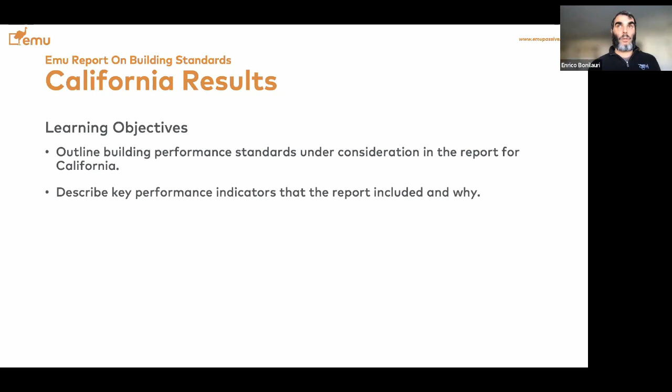So today's learning objectives, especially for those pursuing AIA continuing education credits: outlining the performance standards under consideration for this report, presenting specifically the results for California, describing key performance indicators included in the report and why we selected those indicators. We're going to outline the results comparing different building standards, describe the key factors that drove these results, and how professionals can utilize this data in designing better buildings, as well as informing colleagues and clients about passive house and why it's so important to build better buildings.

I divided this presentation into two parts. One is the overview of the actual full report, because this gives the context of how these California results were developed. Then in the second part, we're going to talk about specifically what this means for California.

Taking a step back and looking at the Emu report on building standards, we are in a market where there's a big push in North America toward electrification, driven from the top, with the Biden administration pushing for 80% renewable energy production by 2030, 1 in every 3 vehicles sold by 2030 to be electric, and to quadruple the use of heat pumps in residential projects. So there's a big push towards electrification.

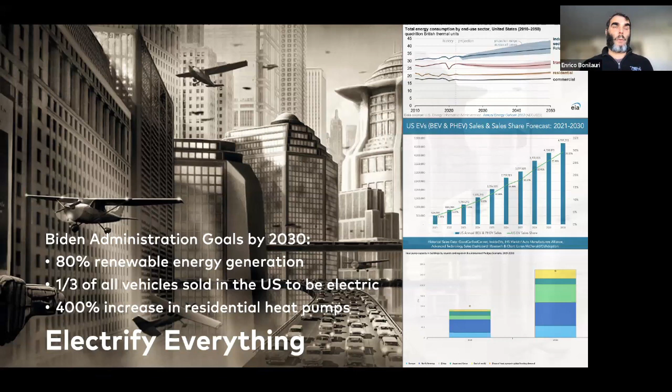This is in the context of also trying to make our buildings better. In fact, a quote I always love to bring up, by Rem Koolhaas, is that people are voluntary prisoners of the buildings that we build. So we build our own caves, and we spend over 90% of our time inside buildings. The quality of the buildings we occupy has a direct, strong impact on our health and well-being, and that should never be underestimated. So in comparing these standards, we had a strong focus on the quality of the building, not just in terms of energy performance, but also on how these buildings can be good shelters for people.

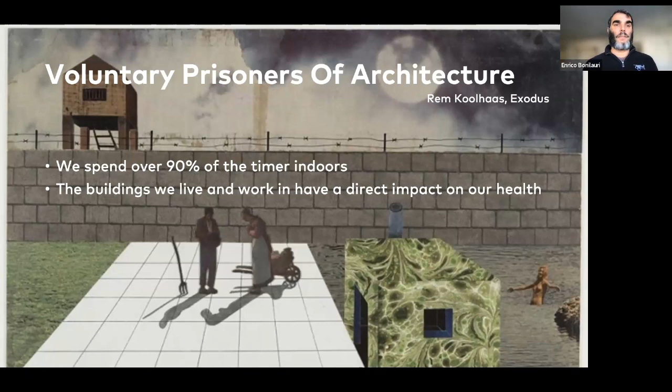Now, a question we always ask builders and people who participate in our training is: on average, how many years do you think an American family stays in a house before they move out again? This is key because all the investment we make in our buildings impacts the people who occupy them.

The answer we get from builders and professionals in the US is typically 5 to 7 years, and that is grossly inaccurate. It's actually 13 years on average. This isn't a statistic from PHI or the Passive House community—it comes from the National Association of Home Builders, who could care less about building better because they have their own interests. But this is independent data showing how long people stay in buildings, even in the US, and that's important to keep in mind throughout this presentation.

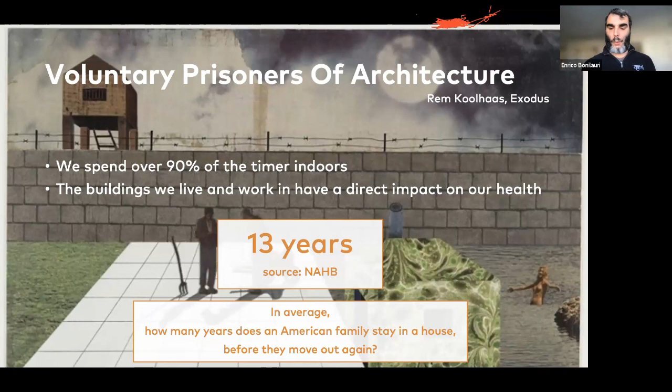The next few slides I'll brush over quickly to give you the idea of what's going on. These are the 50 projects we selected for the study, coming from our own pool of projects we work on for the consulting side of Emu, which is basically split 50-50 training and consulting. We selected these projects to be consistent, trying to have a blend of different climate zones so no one zone would overly impact the results. These are all single-family homes, new construction, giving us a high enough number of projects to be statistically relevant while staying fairly consistent.

The split between climate zones was a quarter of projects in climate zone 2 and 3, many of them in California. As many were in colder climate zones, and then half of the total projects were from mild climate zones. These refer to the national climate zone definitions.

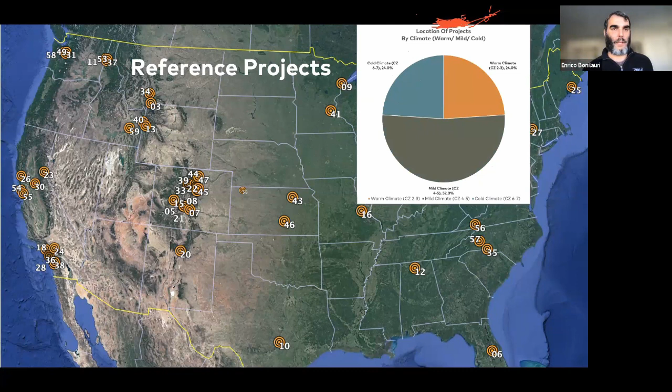These are actual projects, not some random standard design you'd find in an abstract ASHRAE standard. There's a client, a site, a surrounding, an architectural design. The high enough number of projects allows us to dilute outlier aspects, for example a lot of glass or a high form factor.

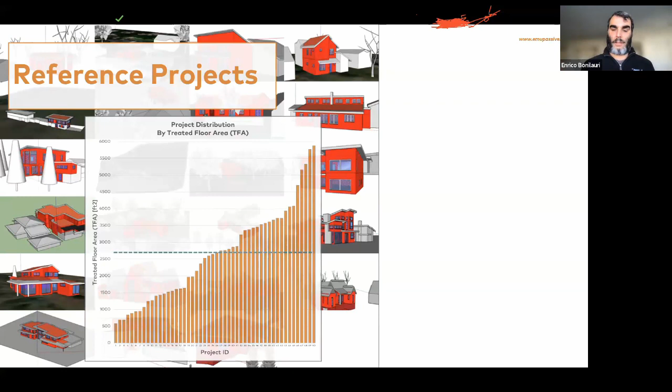If you download the report, there's a link towards the end of the presentation where you can find all the data for these projects. I don't want to spend too much time on this right now. There's a range from 500 square feet to about 5,000 square feet—we tried to select a range that was consistent. This is put in the context of form factor. I don't need to speak too much about that today, but please look at the main report for more data on that.

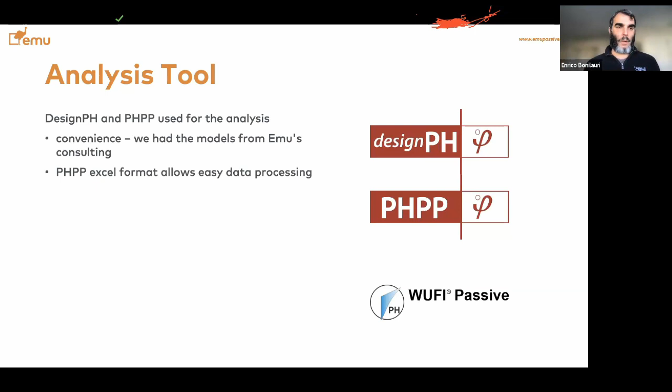For the analysis tool, we modeled all of these projects in DesignPH and PHPP. We did that out of convenience because we already had those models set up in our consulting practice, and the format makes it easier to elaborate. We didn't want this study to become a comparison of two, three, or more different softwares—we want to compare the requirements of different building standards, and we'll get to that. In fact, energy performance is just part of this result—it's not even half of it. So I'm going to skip over this; we'll see a little bit more in the next few slides.

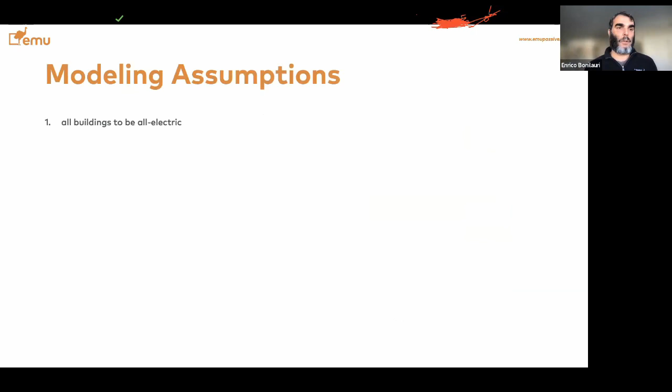Our assumptions: buildings were all-electric, because that's the direction the market is going. All buildings have active heating and cooling via heat pump, including ones in the mountains in Colorado, and domestic hot water via heat pump water heaters. Interior temperature was set at 70 degrees for wintertime and 74 degrees for summertime. We decided on this because, in my opinion, it's more representative of how buildings are actually operated in the US. So when we talk about PHI and Phius requirements, we'll come back to that.

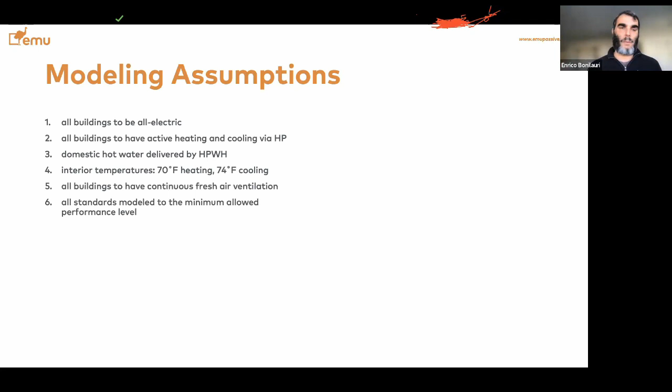All buildings have continuous fresh air ventilation, which is a big stretch for a code-minimum building—we talk more about that in the main report. All standards were modeled to the minimum level allowed by that standard. So if Title 24, Phius, PHI, Energy Star, or whatever has a minimum requirement, that's how we set it up in the model.

We talked about the effective R-value set up in PHPP. We did not account for the impact of catastrophic thermal bridges, which we'll talk about in terms of preventing mold and condensation, and how Title 24, for example, does not address that. But that wasn't included in terms of its impact on energy performance.

So again, coefficients and shading were included, and I'm going to skip over this. You can find more on this in the main report, but this should give you an idea of how the study was conducted.

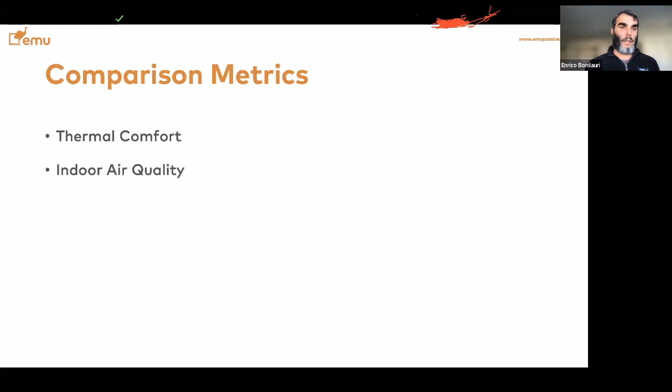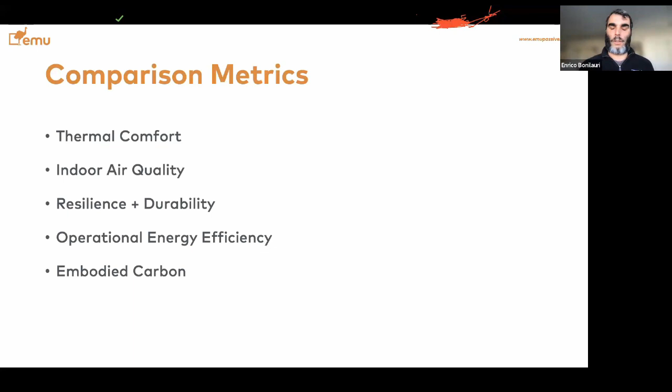Now, comparison metrics: we looked at thermal comfort, indoor air quality, resilience and durability, operational energy efficiency, and embodied carbon. These are the main metrics included in the report. So energy efficiency is only one of five. When it comes to California, we're also looking at indoor quality and comfort. Energy performance is only one piece of the puzzle.

The report has a big summary table that is kind of difficult to navigate. By the way, at the end of this slide deck there's a link to a channel on our YouTube platform where we have recorded videos covering these individual topics if you want to learn more.

Reduction of site energy for heating and cooling - again this is data from the main report. We're about to switch to California specific results. On average, this is what you can expect. For the main report, we used the 2018 IECC standard as the baseline. You'll see that if you don't account for PVs, California Title 24 does not look very performing, does not look very good at all, in this context. We'll come back to this point, but fundamentally California Title 24 is very close to the requirements of the 2018 IECC, except for the need for heat pumps and PVs. We're going to see how that impacts the resiliency of the building.

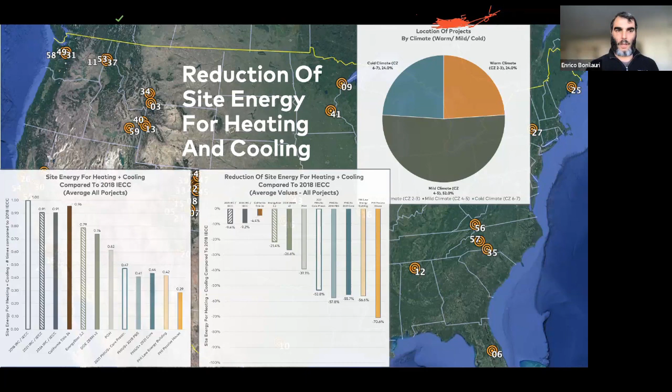This is benchmarking the same results for IECC and PHI. Again, look at the report for more information. This is for the whole study, so I don't want to spend too much time on this today.

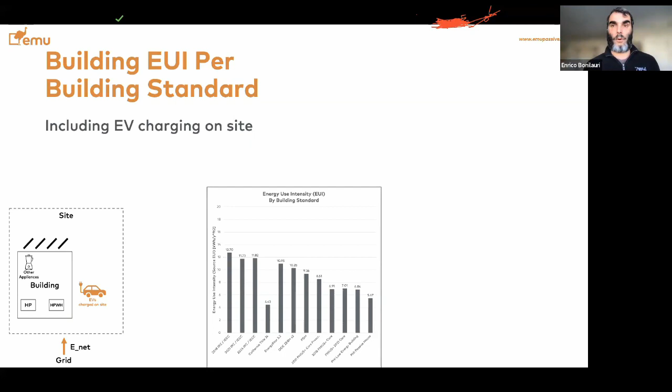For the EUI, something we covered in the report and will touch on for California today, is that once we start factoring in the adoption of electric vehicles, the efficiency of the building envelope becomes crucial for our infrastructure. In this graph, the solid gray is the EUI average for the buildings in the whole study, for heating, cooling, domestic hot water, and other appliances. The dashed gray and white is the additional EUI once we start charging vehicles at home. The dashed black and white on the right-hand side shows two electric vehicles per home charged. What's interesting is that today you can build a code-minimum building that complies with the IECC standard, and for the same amount of energy consumption, you can build a PHI passive house and charge two electric vehicles.

So in this context, for our infrastructure, it's key to have good electrical infrastructure. If we don't want to double the number of power plants we have, we need to invest in the quality of building envelopes so that we can minimize the impact and energy need that buildings have, freeing up power to charge electric vehicles.

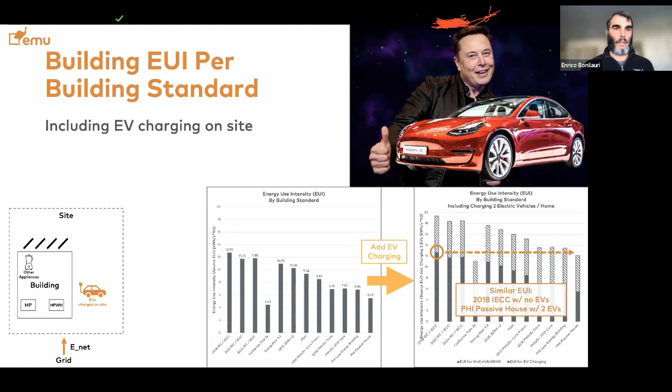Again, this information is described more in detail in the main report - please refer to that for more detail. The results are very complex: we talk about comfort, indoor air quality, resiliency, energy performance, and embodied carbon.

It's difficult to add 1,000 kilowatt hours to 3 ACH50 to a filtration grade of a filter. Because of that, for the report we developed a scoring system where for each of these five categories - thermal comfort, indoor air quality, resilience and durability, operational energy reduction, and embodied carbon - we gave points to each standard and had a final grading. This is illustrated better in the main report, but it's a simpler way to communicate the value each building standard brings to the table.

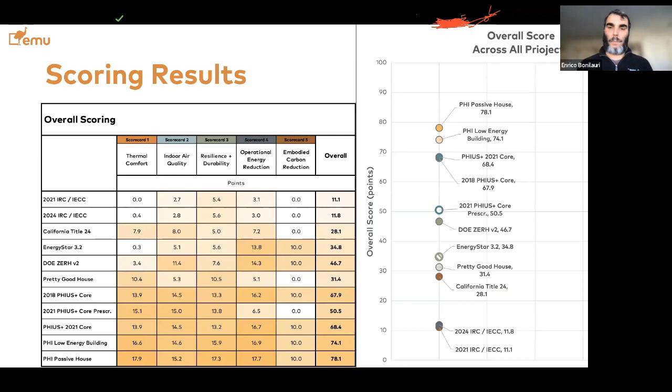Now, coming to the results for California: we have 11 projects we consulted on, mostly around LA, the Bay Area, and some in the mountains too. We have a breakdown like this for California climate zones. It does not represent all climate zones the same way, but it's a fair spread in my opinion - it gives a good sense of what's going on in this state.

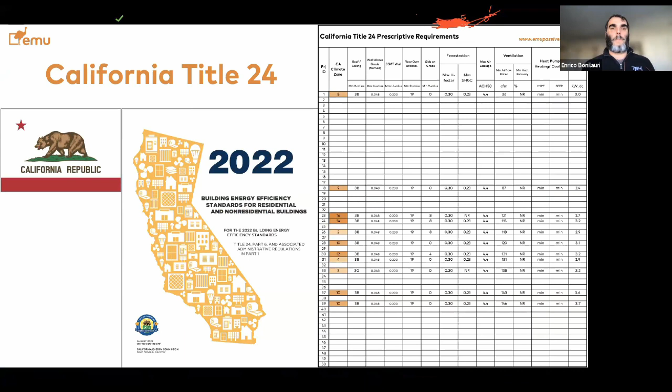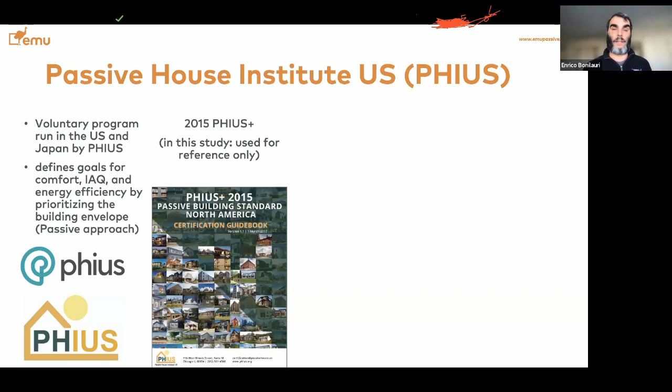For California Title 24, we derived the requirements to then be modeled in PHPP from the California Title 24 requirements, and this was our baseline for this appendix. For the PHIUS standard, we used the 2015 PHIUS Plus mostly for reference - we didn't really model it since it's 7 or 8 years old. We used the 2018 PHIUS Plus core, and the 2021 PHIUS Plus core, as well as the 2021 PHIUS Plus core prescriptive.

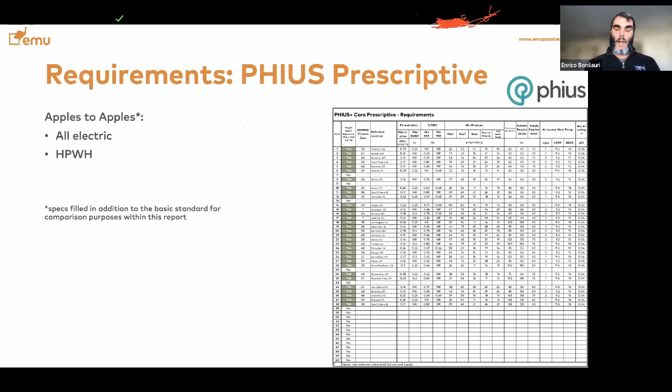These are standards that we used in the modeling for this report. The PHIUS prescriptive requirements for the 2021 PHIUS Plus core prescriptive we derived from the PHIUS website, project by project. That is for the prescriptive PHIUS, and for the performance-based PHIUS, the 2018 and 2021, we used the online calculators to determine the project-specific targets for heating demand and cooling demand.

Now, remember, this whole study is set up to have 70 degrees interior temperature during heating season and 74 during the cooling season. PHIUS and PHI both use 68 degrees for wintertime and 77 for the summertime. So the way we did it was we determined the maximum allowed heating demand for PHIUS through the website. We set up the PHPP models to meet that, assuming 68 and 77 degrees set point temperatures. And then we upped those temperatures to 70 and 74 to get the heating and cooling demand results. Same we did with PHI.

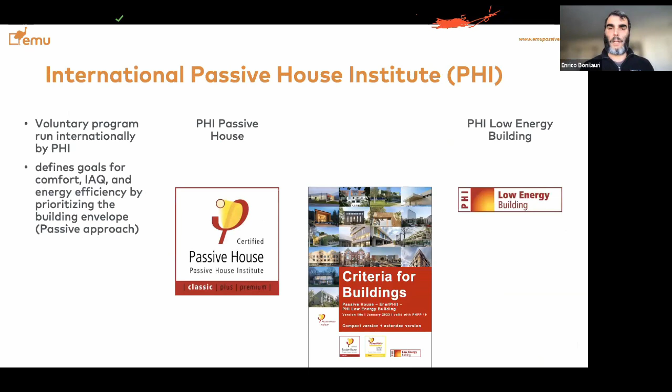For the International Passive House Institute, we modeled both the PHI passive house and the PHI low energy building. And in the same way, we set up the PHPP models to have 68 and 77 set point temperatures, and then we changed those to be 70 and 74, as that was deemed to be more realistic for the way buildings are operated in the US.

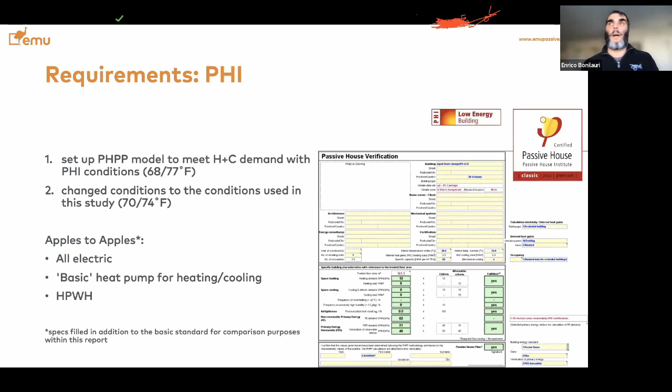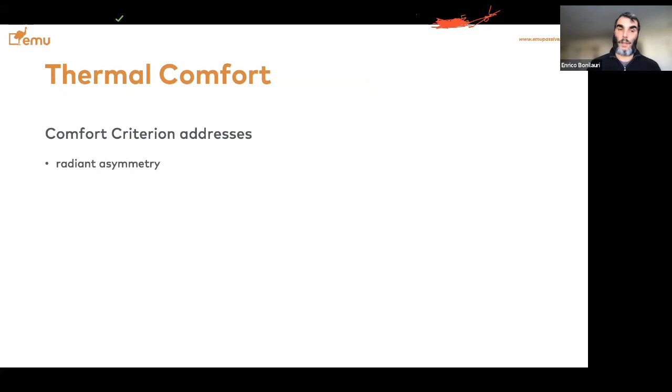Starting off with the metrics for building quality, as we call them in this report, we covered thermal comfort, indoor air quality, durability, and resilience. Starting with thermal comfort, the comfort criterion addresses the radiant asymmetry or lack thereof, and the absence of downdrafts. And the air tightness, which is the second parameter that we included in the thermal comfort bucket, addresses drafts and stratification, or prevents them. So passive building standards, which include PHI and PHIUS, have similar comfort criterion requirements as well as air tightness requirements.

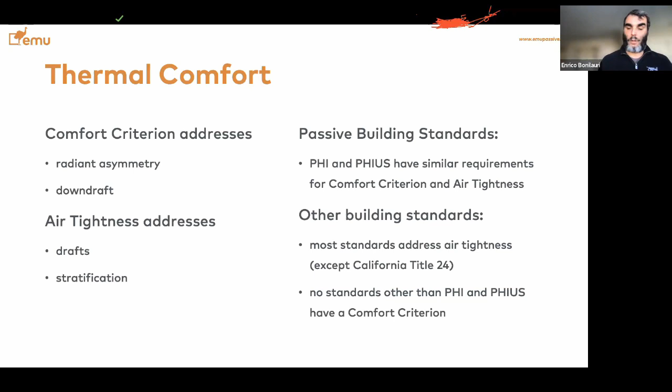We're going to see those in detail for California. Whereas other building standards, in this case Title 24, have no requirement for air tightness. We're going to see more of that later, and it does not have any requirements for thermal comfort in terms of specifying window requirements.

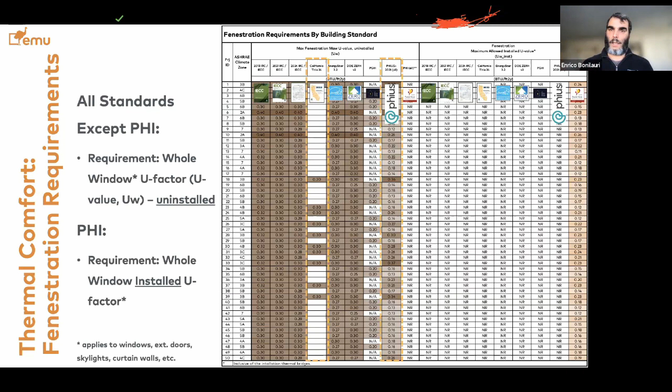This is the U values or U factors required by each standard. On the left-hand side, we have the uninstalled parameters. Uninstalled means that it's just the value that you get from the window manufacturer, whereas on the right-hand side, you have the installed whole window U values. And that is because PHI's requirements are driven by setting goals for thermal comfort. And so using the installed value also factors in the thermal bridge of installation. And these specifically are the columns, not that we care too much about individual data here.

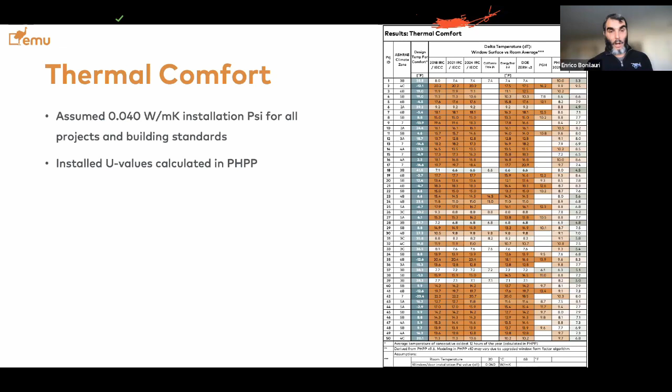Looking at this closer, we assume 0.04 watts per meter Kelvin installation PSI values for all projects and for all standards. And to be honest, that is pretty generous with regard to California Title 24, because if you have a traditional nail flange installed, the PSI value there can be twice as high or 3 times as high, especially if you're using some aluminum nail flange. So using 0.04 is very generous with regard to California Title 24. The installed U values were calculated in PHPP and averaged out.

With these results from the table on the right-hand side, California Title 24 fails to deliver thermal comfort in about every other project. Let it sink in.

It's California, it's mild. I'm from Italy, and everybody thinks that Italy is a warm, fuzzy country, but it can be very uncomfortable. I also lived in Sydney, Australia, for a couple of years, and that was the most miserable winter I've ever spent. I lived in Germany too, I live in Colorado, but because the assumption was that Australia is warm, buildings were built very poorly, and there were no requirements for thermal comfort.

So the current requirements for Title 24 for windows lead to half these projects failing the comfort requirement. For half of these projects, PHIUS requirements are actually less stringent than Title 24. That is something we found when comparing PHIUS prescriptive requirements to the Title 24 requirements for windows: in about half the projects, the requirements for PHIUS were less stringent than Title 24. And PHI's requirements achieve the higher level of comfort.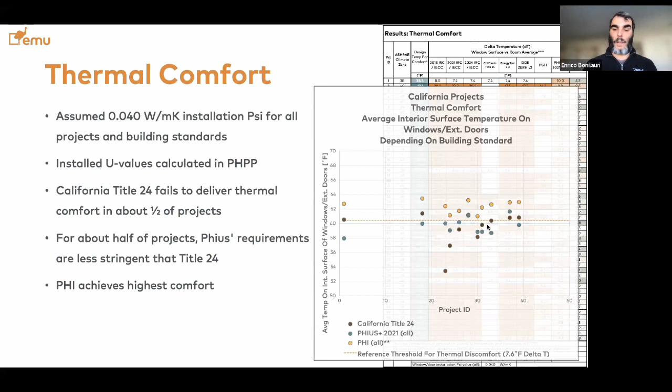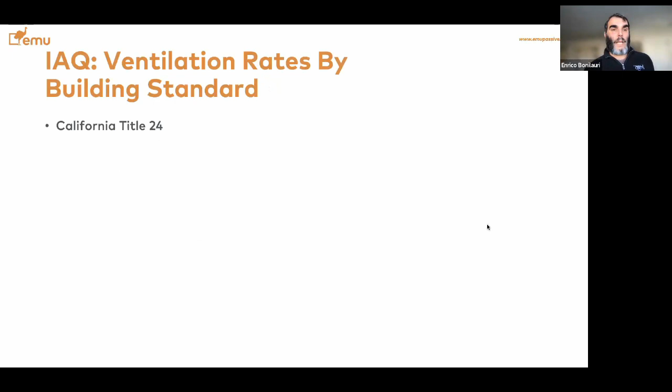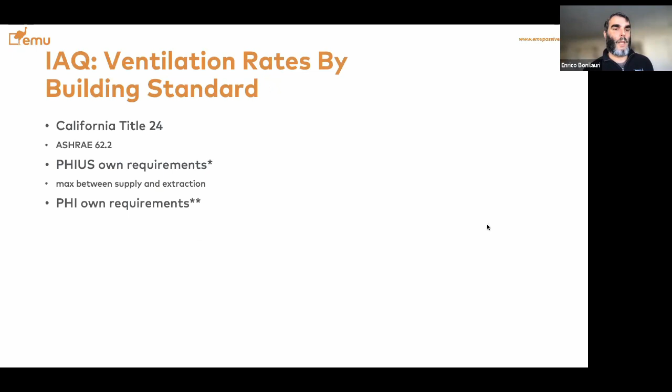Indoor air quality: we are going to talk about fresh air supply, fresh air filtration, air tightness, and avoidance of mold and condensation, as well as other indoor air quality goals. Ventilation rates by building standards. California Title 24 follows ASHRAE 62.2. PHIUS has its own requirement, which is a maximum between supply and extraction. PHI has its own requirement between supply, extraction, and volumetric.

62.2, this is where we're talking about building standards. We're not talking about individual projects. ASHRAE 62.2 assumes the number of occupants to be the number of bedrooms plus one, and PHIUS, on the other hand, assumes the number of occupants to be the same as the number of bedrooms. And I had conversations with a few people about this. They were pushing back on this parameter, saying that PHIUS follows the same ASHRAE 62.2. It's not true. If you look at the PHIUS guidebook version 3.1, I think it's page 35 or something, it clearly states that the number of bedrooms is the number of occupants.

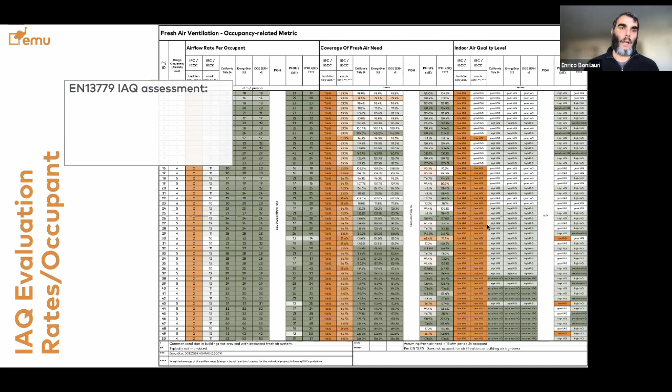And in this study, we used the actual airflow rates that we, EMU, specified for the project that we were working on for PHI. So this is the big table showing the airflow rates, looking at what that means in terms of indoor air quality. Standard EN 13779 assesses the level of indoor air quality based on the CO2 concentration levels. Air filtration is not accounted for, air tightness is not accounted for, it only looks at the CO2 levels, but it's a start. We're going to see the other parameters later in this presentation.

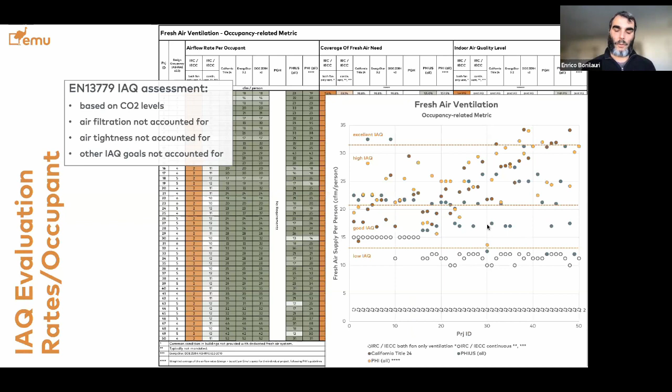This is the airflow rates for all of the standards we consider for the whole report, and this is for the averages across all projects for California. And you see that the three standards we're looking at, Title 24, PHIUS, and PHI, all fall within the high indoor air quality on the CO2 concentration levels.

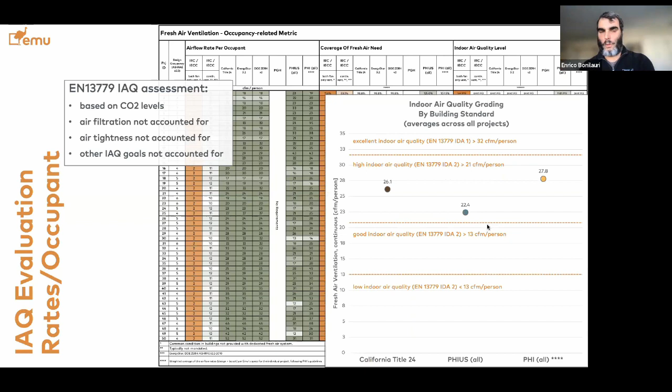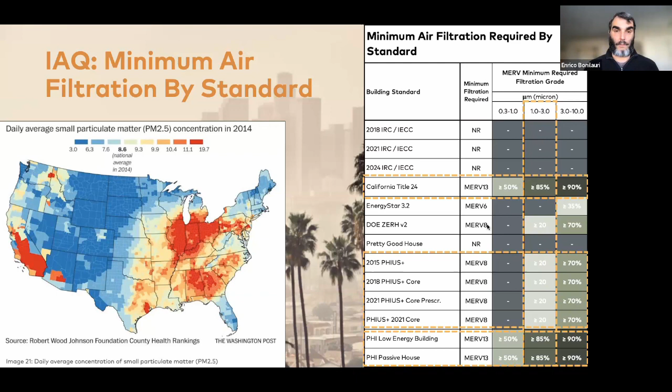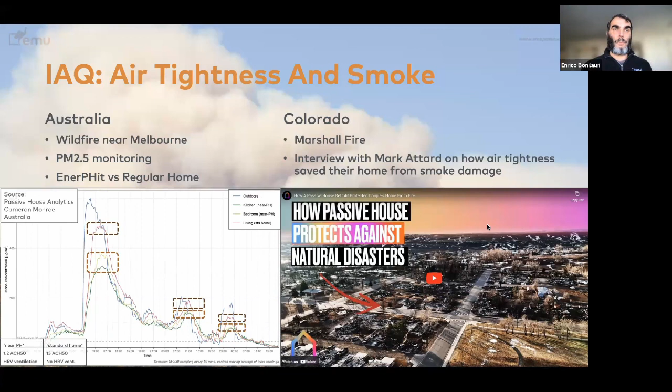And California Title 24 does zero towards the airtightness of the building. So in my opinion, the approach that Title 24 has put in place, it's half done. We have the ventilation, we have the filtration, and we have nothing with regards to the airtightness. So that is something that I think needs to be addressed in the near future.

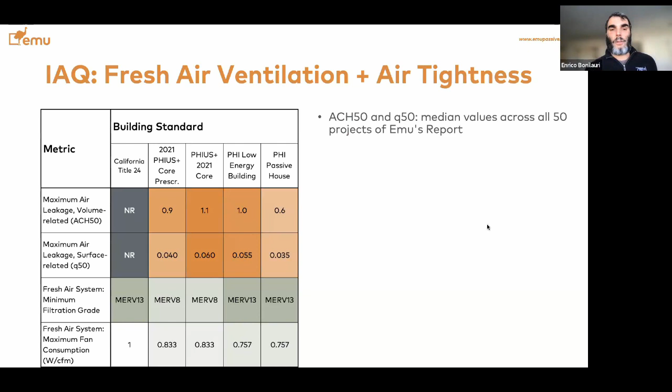This is a summary of the result that we covered so far. The ACH values and Q50 values that we list here are the median values across all 50 projects of Emu's report. The ACH 50 value is the volume-related maximum allowed air leakage by building standard. Phius does not set actual ACH 50 values, but we have calculated those. I think it comes up later in this presentation. It averages out at about 1.1 ACH 50 for the Phius core and 0.9 ACH 50 for the core prescriptive.

California Title 24 has no actual maximum allowed. There's no need for testing, and the building can be as leaky. I think the page on Title 24 is like 3 lines that tells you air seal everything, and that's it, which is kind of, I was very shocked and disappointed when I read that in reviewing Title 24. Phius prescriptive is actually more stringent than the Phius performance-based. And then PHI passive house requirements require the building to be about twice as airtight as a Phius performance-based.

And then we talked about the filtration, something about the efficiency of the fans. Title 24 sets a maximum of 1 watt per CFM consumption for the fans for the ventilation system. It's about 0.83 for Phius and about 0.757 for PHI, in case you were wondering.

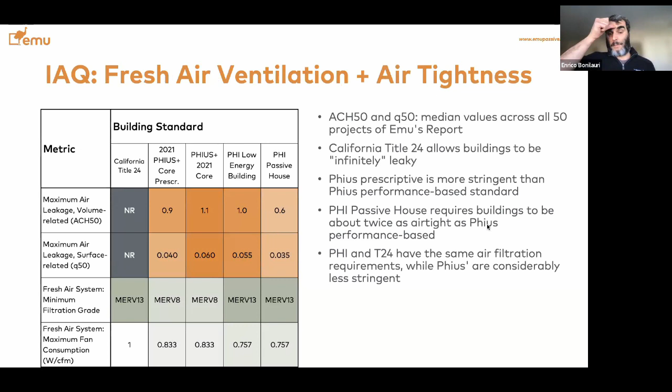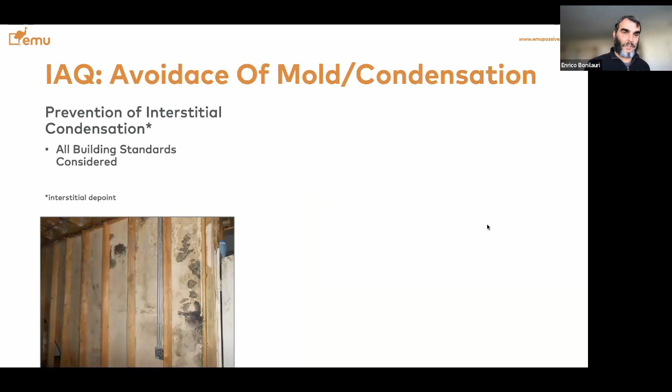Avoidance of mold and condensation is one of the most misunderstood parts of passive house. Everybody and their dog knows about the prevention of interstitial condensation. All 12 building standards that we have considered in the main report address it, and that is addressing interstitial dew point, which is a different phenomenon than surface mold and condensation, which is when we have thermal bridges, and thermal bridges cause lower localized temperature that provide the ground for mold to develop. And mold requires no condensation.

And that is something that most American professionals still have a very hard time to grasp, because it's so not addressed by code that it sounds very new. This picture on the left-hand side shows the after the fact of a building retrofit where they only changed the windows because code allowed that. The building became more airtight and filled up with mold because it had no actual ventilation system. So the more we try to air seal our buildings, the more we try to make our buildings more energy efficient, the more we need to care, because in my opinion, there's no point in making a building more energy efficient if it is also not healthier.

Phius addressed this partially. They accept the NFRC condensation resistance and the condensation index, as well as the AAMA condensation something, whatever it's called, and those are not actual ways to address condensation and mold because it's a blend of different metrics. I'm happy to answer more questions on this later.

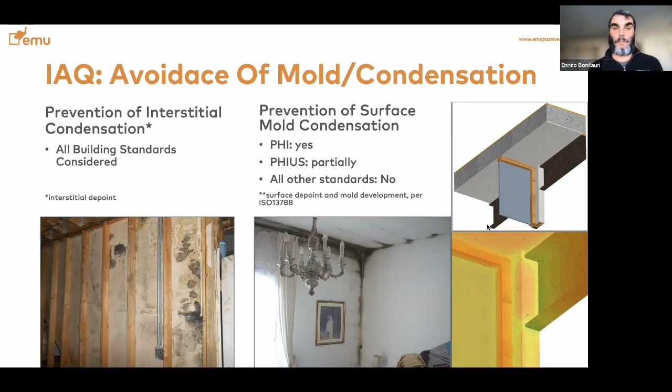PHI does require this. This is one of the hard requirements of PHI certification, called the hygiene criterion. Hygiene equals absence of mold. And what it looks like is basically thermal bridge modeling, where you can see localized lower temperature on the surface. In this case, we have a 3D thermal bridge of a beam crossing over to the exterior, uninterrupted, non-thermally broken, which causes all kinds of issues, mold and condensation. And this is by an architect that is famous to be a green building architect, but has never built a passive house because he wants to pull off this stuff.

Other building goals for air quality: Phius requires the EPA Indoor airPLUS certification, which has some requirements. It's a checklist. There's nothing too fancy about that. There's moisture control, radon, pest control, HVAC system requirements, combustion pollutants, and other materials in terms of limiting VOC and other parameters.

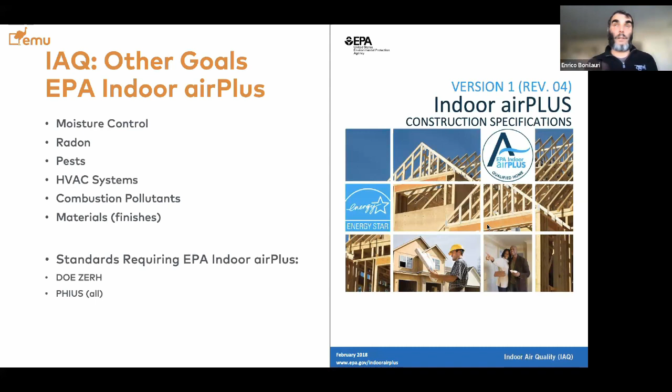I did not have time during the study to investigate how much good this certification does to an actual project. I'm considering pursuing this for my own house to be built in a couple of years, just as a way to try to improve the quality and also having a better experience with this standard. As I mentioned, DOE Zero Energy Ready and Phius required this certification, which was accounted for in the scoring that I mentioned earlier.

Talking about resiliency and durability, we discussed the reduction of air leakage because it makes buildings more durable. We're going to see about that, including avoidance of interstitial condensation, mold and surface condensation, and thermal resilience.

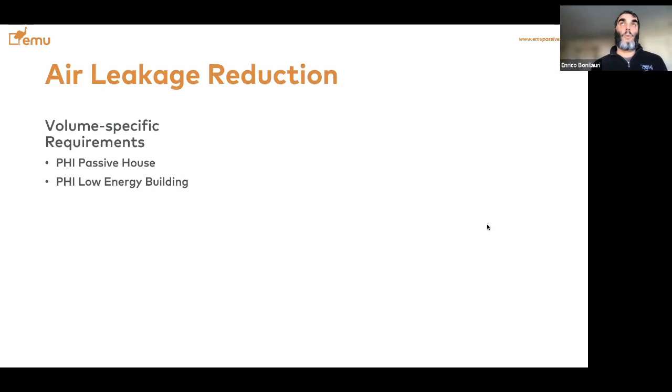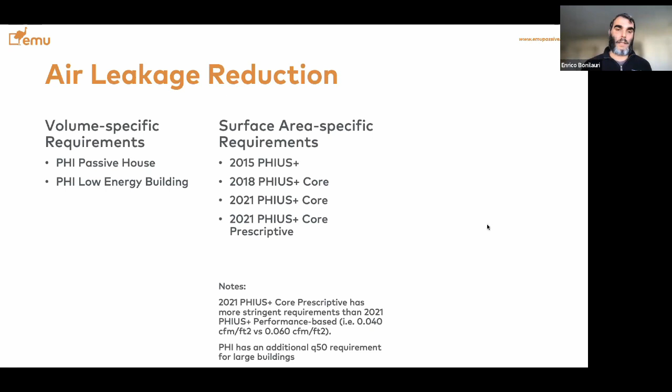The air leakage reduction, let's look at this in more detail. PHI requires a volume-specific requirement, the ACH50. The surface area specific requirement, the Q50, is required by Phius, with a note that the prescriptive Phius has more stringent requirements than the performance-based. PHI for very large buildings has a surface area specific additional requirement for certification. And then there is California Title 24, which has no requirements.

The value we see in the next slide, 4 ACH50 for California Title 24, is what we used in the modeling, because we cannot use infinite in PHPP, but it was derived by how the software is set up for California Title 24. There's no actual requirement for California Title 24 - it can be as leaky as you want it to be.

Volume-related ACH50, we calculated - you cannot convert 0.6 ACH50 to Q50 in general. You can do that for a single project because it has a combination of net volume and envelope area. But because we chose 50 projects intentionally, we could have a high enough number to draw statistical conclusions. Phius does not have any ACH50 requirements, but we were able to calculate those from these 50 projects.

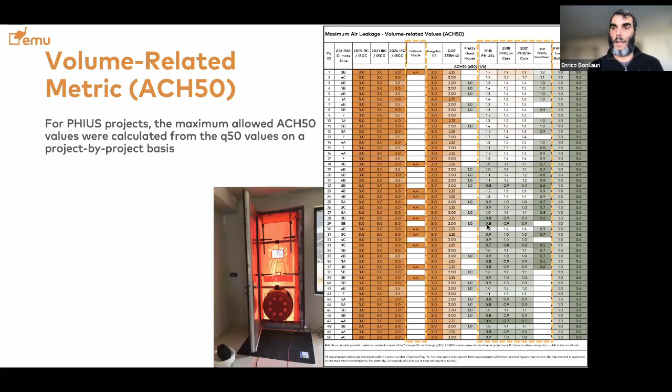PHIUS requirements for smaller buildings can allow up to 1.9 ACH50 based on the same 0.06 CFM per square foot requirement for the surface related metric. And this is for PHI on the right-hand side - we can skip that. For the Q50, surface related, same way - PHI does not have any Q50 requirements for this size of buildings, so we calculated these backward from the volume and envelope area of these projects.

This is again California and PHIUS, basically looking at the same air leakage measured at the blower door test and then related to the building volume or the building surface area. These are the median values across all 50 projects - on the left-hand side we have the volumetric, and on the right-hand side the surface-related values.

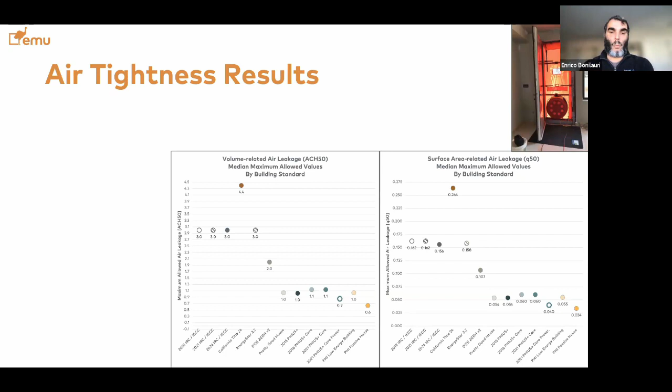Required by each standard, you see that on average Title 24 is through the roof, literally. Then there's a fair amount of building standards that require about 1 ACH50. PHIUS performance-based is about 1.1 ACH50 - median values across the 50 projects we modeled - and about 0.9 ACH50 for the prescriptive PHIUS. Whereas PHI low energy building is 1 ACH50 and 0.6 for PHI passive house.

Now, the ACH50 is more commonly known in the US. It is harder to meet for small buildings, and it is not as indicative in very large buildings. The Q50 value, the surface area related metric, is less common in the US. It's more strict on large buildings, and more lenient with regards to small buildings.

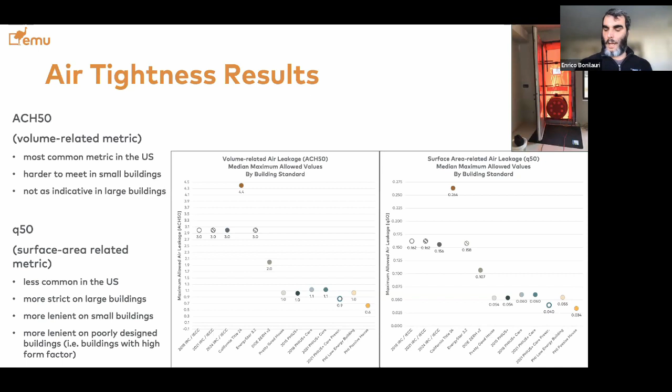It's also more lenient on buildings with high form factors, because the allowed air leakage is proportional to the amount of surface area that you have. So the higher the form factor, the more inefficient your building is, the higher the allowance you get for the blower door test using the surface related metric. This is talking about the metrics themselves, because that has an actual impact on evaluating them. For California Title 24, it actually allows infinite air leakage because there's no requirement at this point.

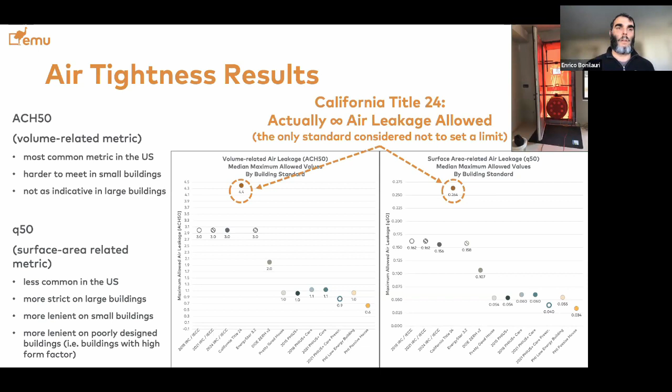Talking about resiliency, this is the Icebox Challenge in Denver, Colorado for the conference. I'm going to speed up a little bit. These are the pods that we have in class for the workshop where builders build mini passive houses.

They both mimic the resiliency of a passive house, where the envelope is very well insulated and very airtight, so it can keep the heat in case of the pods over time even if the power goes out, and it can keep the cool in case of the Icebox Challenge even when the air conditioning goes out. This is very important for California, because when the grid fails, the building is able to remain livable even if the heating and cooling system are not running all the time.

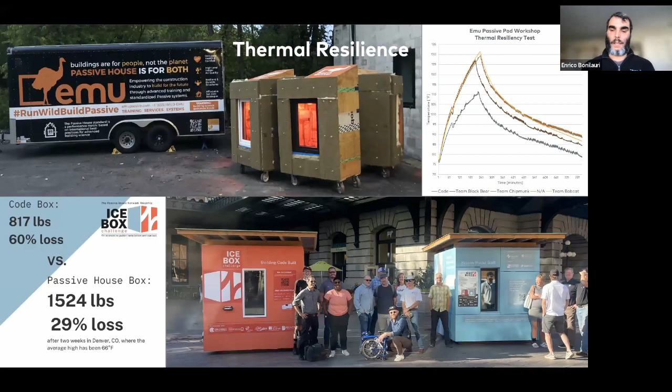Now, to try to mimic that - this is kind of the thermos versus coffee pod functioning that we have. To address that, we looked at the heating and cooling loads, and we tried to extrapolate the inclusive R-value for each building standard to estimate which building standard makes buildings more resilient.

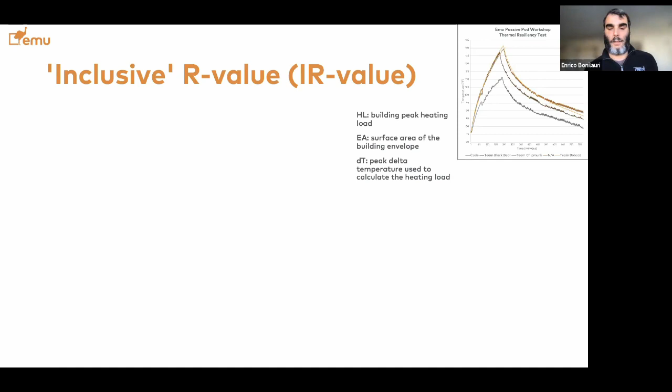This is the formula, it's described better in the report. I'm trying to speed up a little bit because we are falling a little behind.

The most resilient standard we considered is PHI Passive House. You see that in this scenario, the California Title 24 does not look that well. It's going to look better when we talk about energy efficiency, but that's thanks to the heat pump requirements and PVs. In other words, if or when those fail, the envelope of a California Title 24 building is not very good, and that leads to the building becoming unlivable much quicker.

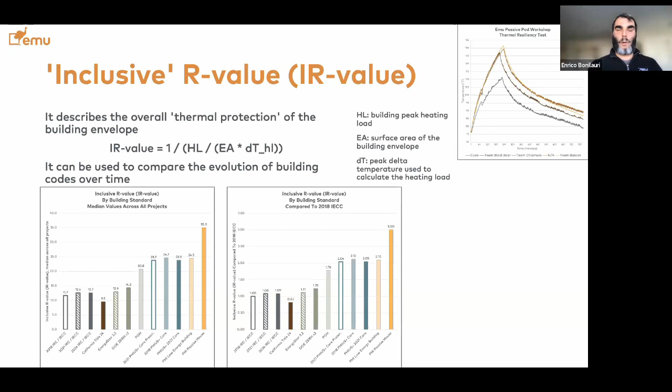Now we start talking about energy and embodied carbon. We're going to look at our site findings: site energy for heating and cooling, energy use intensity, and future-proofing for EV adoption.

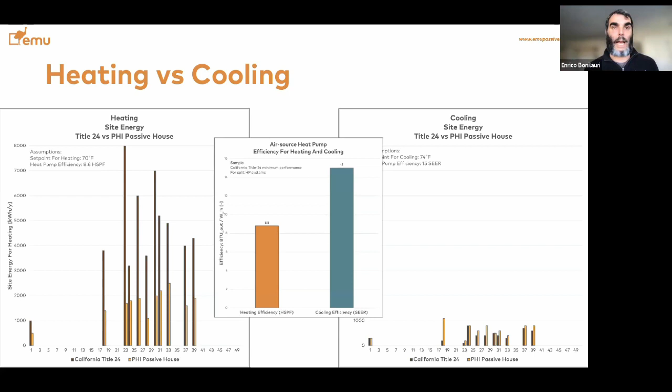As we move toward looking at EUIs and electric vehicles, something about net zero: one of the first definitions of net zero building was given by the DOE back in 2015, and it did not include on-site charging of cars, only on-site charging of vehicles used within the site. Whereas newer building standards for net zero carbon and net zero energy do include on-site charging of electric vehicles. So the market is moving forward, and net zero is evolving to start including EV charging.

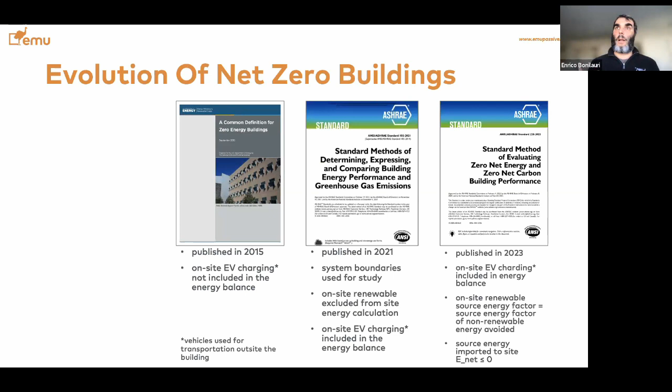And we're going to see how difficult it's going to be to achieve net zero if the building is not Passive House, even in California.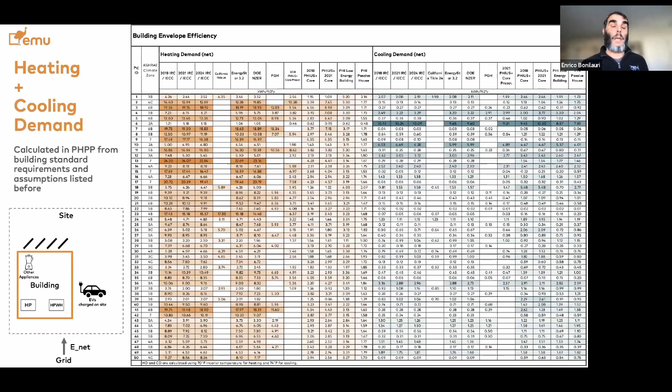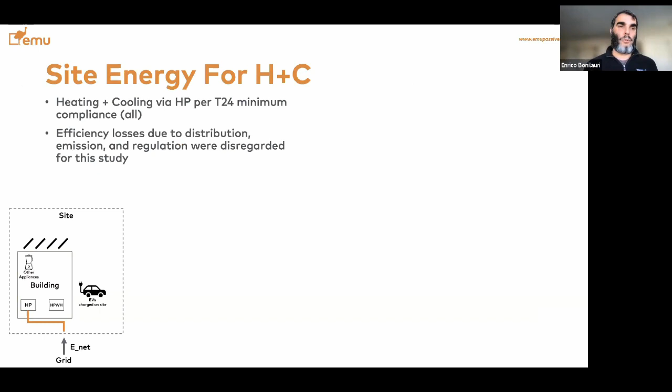Skipping forward a bit, the heating and cooling demand was calculated for each project and building standard in PHPP. This demand is driven only by the efficiency of the building envelope; we don't factor in the heat pump system yet. We assumed heating and cooling via heat pumps per California Title 24 minimum compliance, and efficiencies or losses due to distribution, emission, and regulation were disregarded to simplify things. At this stage, looking at site energy, PV production is not accounted for yet.

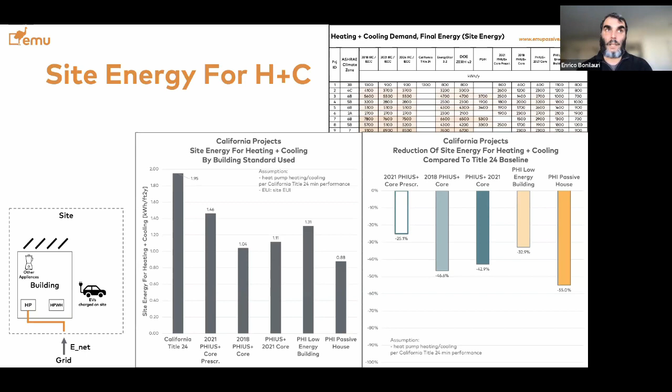This is what all 50 projects look like, and this is what the California projects look like. Overall, the average site energy for heating and cooling shows a reduction compared to Title 24 of about 25% for the PHIUS prescriptive, 46% for the 2018 PHIUS, about 43%, a bit less performing, for the 2021 PHIUS core—that's because they raised the allowance for heating and cooling in the 2021 update—then about 33% for PHI low energy building, and about 55% reduction in site energy for heating and cooling for PHI Passive House.

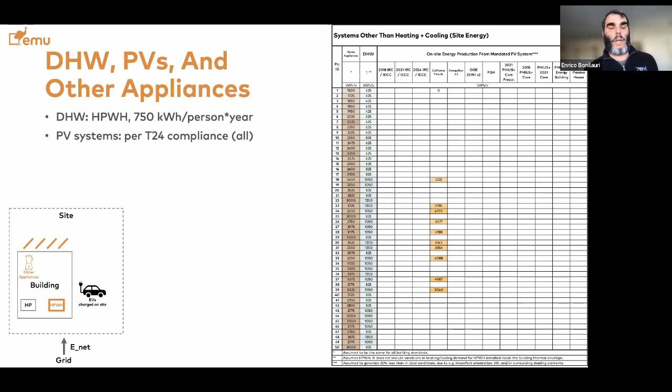Now for domestic hot water, PVs, and other appliances—this wasn't really the focus of the study. The study focused on the quality of the building envelope, because that's where a lot of value is for occupants; that's why we spent so much time on comfort, indoor quality, and durability. We assumed 750 kilowatt-hours per person per year for domestic hot water via heat pump water heater, and we looked at PV system size based on California Title 24 requirements.

This is the breakdown, and this is the site EUIs for the different standards, averaged for the California projects, not yet including charging an electric vehicle on site.

When we start doing that, this is what it looks like. This is the same graph we saw earlier, where the solid gray is the site energy for heating, cooling, domestic hot water, and other appliances, and the dashed white and gray is, in this case, charging one electric vehicle. So you see that even in California, reducing the need for heating and cooling by adopting Passive House can free up bandwidth in the electrical grid to support charging of electric vehicles as they become more widely adopted.

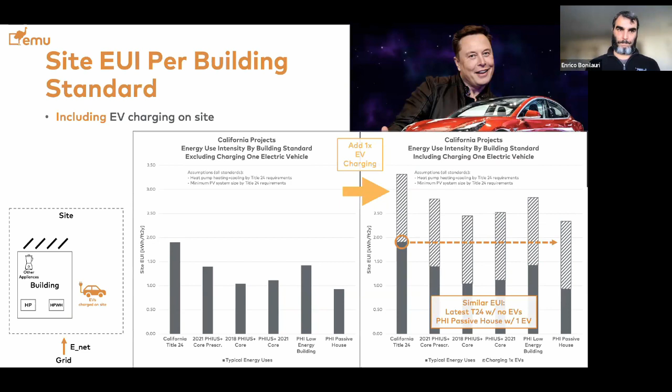So, and this is my recommendation, is to look at performance-based standards, because that is the only way, in my opinion, that you can optimize the way the building performs and make informed trade-offs.

Now, for the sizing of PV systems, this is something already included in California Title 24. These circles show the size and output, kW as well as square feet of PV system needed to balance out for net zero the buildings we included in this project. In the case of no EV charging, that's the smaller light gray circles at the bottom, and in the case of charging one electric vehicle, it's larger.

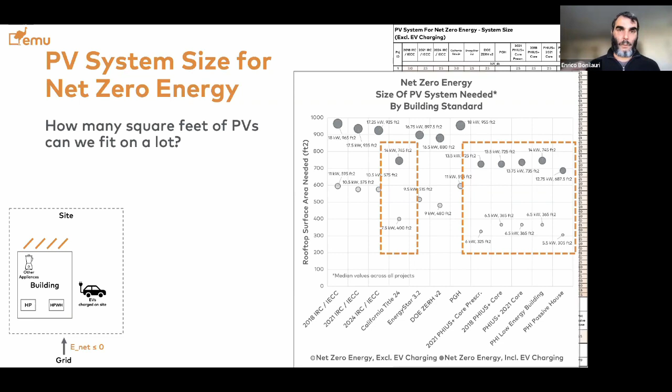So net zero is awesome for many reasons, but it's very important to have efficiency first. Otherwise, we keep consuming energy, and compensating via production of PVs becomes impossible once we start accounting for EV charging on site. Can all sites have 800 square feet of PVs installed? I don't think so, that becomes very difficult to do. So in order to keep this approach, the building envelope needs to be dramatically more efficient, and we get there by switching to passive house.

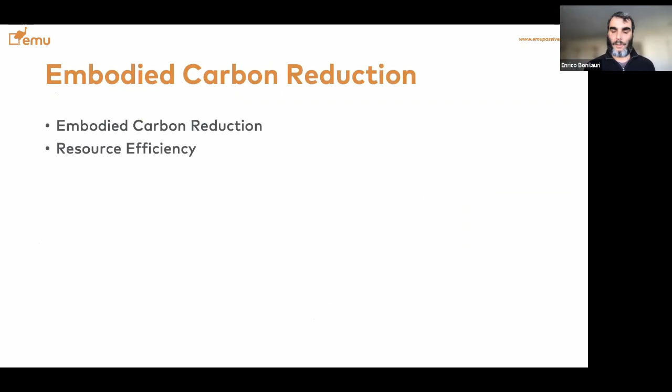Now, embodied carbon - in the main report, we address embodied carbon and resource efficiency. Embodied carbon is not addressed by any of the standards that we covered. You can factor that in by using tools like PHribbon as well as BEAM Estimator, but none of the 12 building standards that we evaluated for this report actually addresses this.

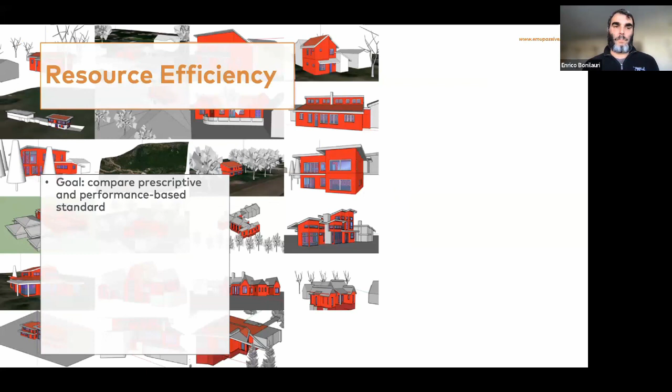Something interesting that we describe pretty well in the report is the concept of resource efficiency. Just to give you an idea, we compared a performance-based standard - PHI Low Energy Building - and a prescriptive standard - Phius 2021 Core Prescriptive - and we selected projects of those 50 where the energy performance of the two standards would fall within 20% of each other.

We found that on average, you could get to the same energy performance with the performance-based approach and avoid using, on average, 830 cubic feet of insulation, just because the output of the energy model tells you how much an R-value or a solar heat gain coefficient does for your project. Whereas the prescriptive approach is blind to the actual performance.

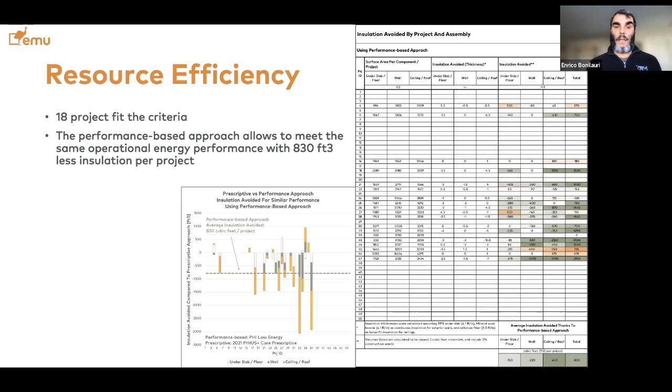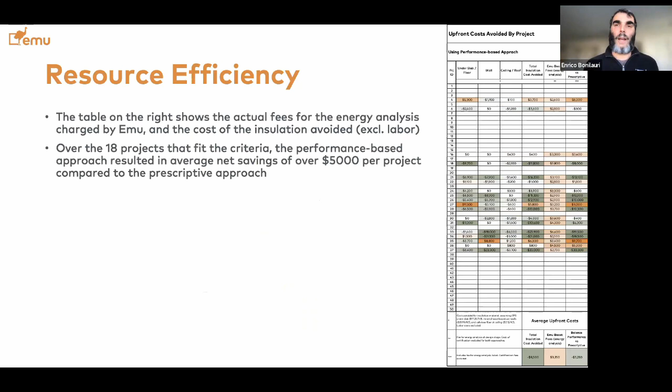And what we found - we also benchmarked our fees for the modeling of these projects, and the performance-based approach, even including what we charge for those projects, was still about $5,000 cheaper than the prescriptive approach. So we found the prescriptive approach to be pretty wasteful in terms of resources. Don't really have time to go over that in detail, but you'll find that in the main report as well as on our YouTube channel.

So, conclusions: even in California, mild climate conditions, Title 24 failed to deliver comfort in half of the projects considered. For indoor air quality requirements - airflow rate per occupant, filtration grade, air tightness, and mold prevention - PHI requirements outperform both Title 24 and Phius. Title 24 addresses air filtration and does not address at all the air tightness of the building. So in my opinion, that is a job half done.

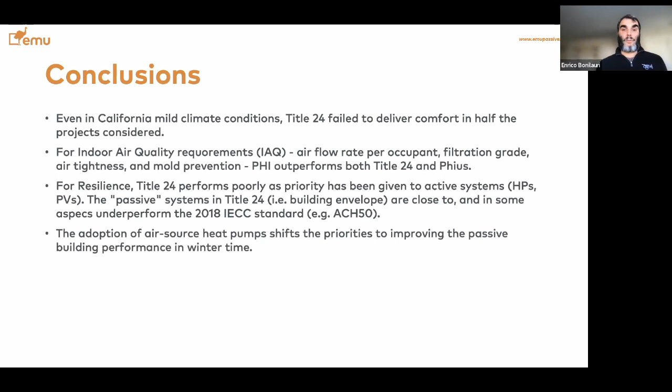For resiliency, Title 24 performs poorly as priority has been given to active systems such as heat pumps and PVs. For passive systems - the building envelope - they are close to and in some aspects underperform the 2018 IECC standard, for example the air tightness requirements. The adoption of air source heat pumps shifts the priorities to improving the passive building performance in wintertime.

For the reduction of combined heating and cooling site energy, passive house outperforms all other building standards with a 55% reduction compared to Title 24, with the 2018 Phius Plus Core ranking second. And the adoption of performance-based passive building standards can significantly reduce the need to increase production of electricity when electric vehicles are more widely adopted.

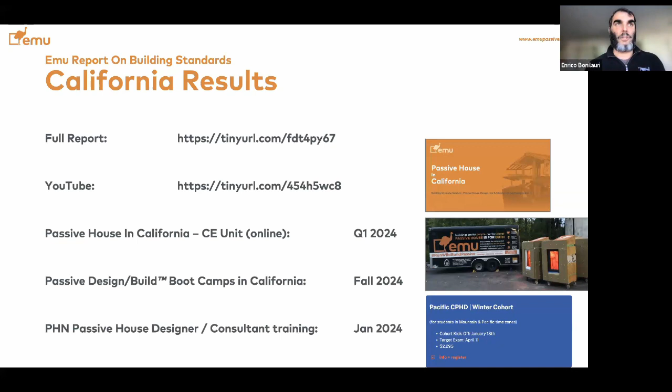Fantastic, thank you Enrico. That is a lot to take in. 2.5 years, I'm sure everybody's heads are spinning. It's really amazing work, a huge accomplishment.

I think maybe talk a little bit about how much there is in this report. We were talking the other day and you said there's just so much more data, you could have a series of reports. What did you leave out, and what was the selection process?

That's a great question. It took 2.5 years to get here, and during that time something I really value is having good questions. We're in the age of information, we can find any answer we want, but formulating a good question takes time. I value that, which is why I like teaching - I get so many questions that I learn a lot from them. I learned a lot in this process.

In the main report we talk about the breakdown of heat losses. If you Google or go on YouTube, you'll find builders claiming 50% or 40% of all losses are through air leakage, and that is far from true. Both for the 2021 code and for Passive House, air leakage counts for about 10% of total heat losses, with windows and exterior walls being much higher than that. Heat losses to the ground count more than air leakage.